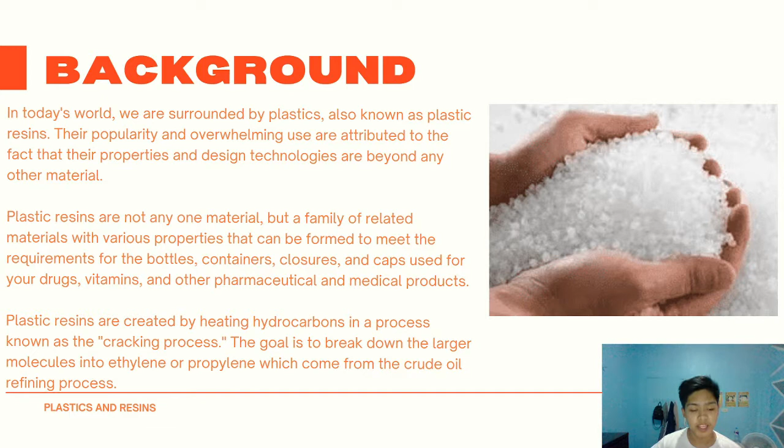Plastic resins are created by heating hydrocarbons in a process known as the cracking process. The goal is to break down the larger molecules into ethylene or propylene, which comes from the crude oil refining process. Let us now discuss the history of the industry.

In 1862, the first man-made plastic was created by Alexander Parkes. The material, also called Parkesine, was an organic material derived from cellulose that once heated could be molded and retained its shape when cooled. In 1907, the birth of the modern plastics era came with the invention of Bakelite by Leo Baekeland. It was the first synthetic plastic which was derived from fossil fuels. Baekeland used phenol, an acid derived from coal tar.

In 1929, Eduard Simon isolated a substance from natural resin. However, he was unsure of the discovery until later when Hermann Staudinger discovered that it was comprised of long chains of styrene molecules, which was a plastic polymer later dubbed as polystyrene.

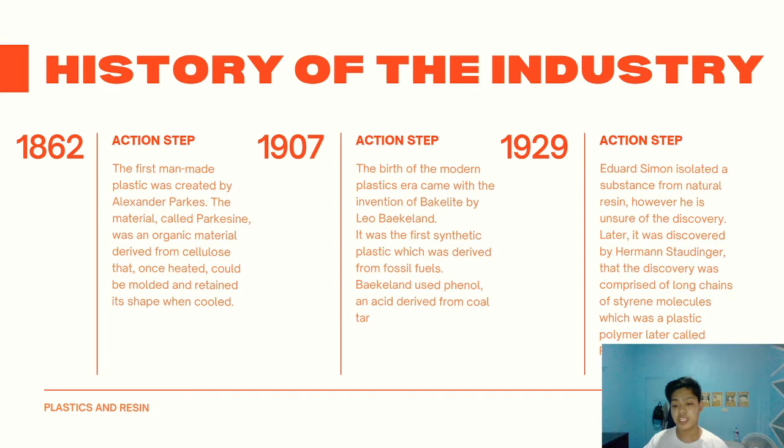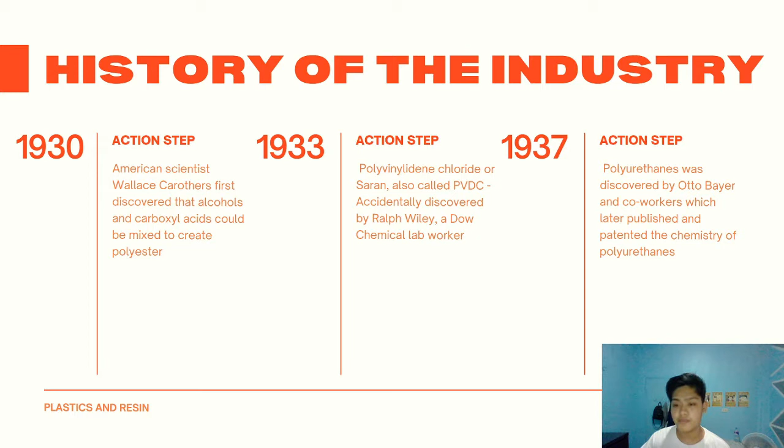In the year 1930, American scientist Wallace Carothers first discovered that alcohols and carboxylic acids could be mixed to create polyester. In 1933, polyvinylidene chloride, or saran, also called PVDC, was accidentally discovered by Ralph Wiley, a Dow Chemical lab worker. In 1937, polyurethanes were discovered by Otto Bayer and co-workers, who later published and patented the chemistry of polyurethanes.

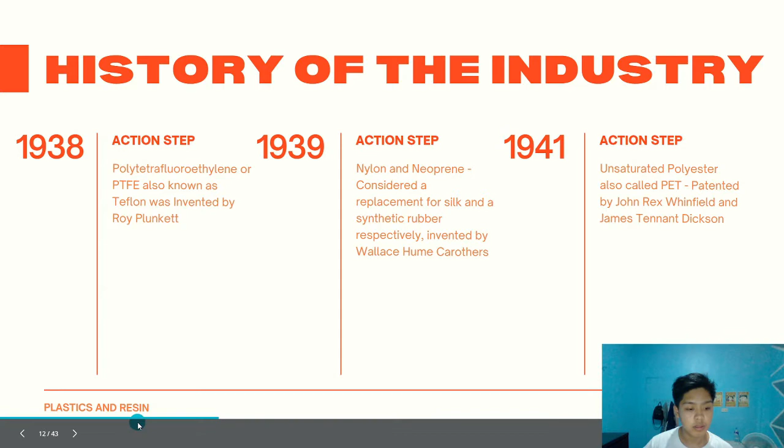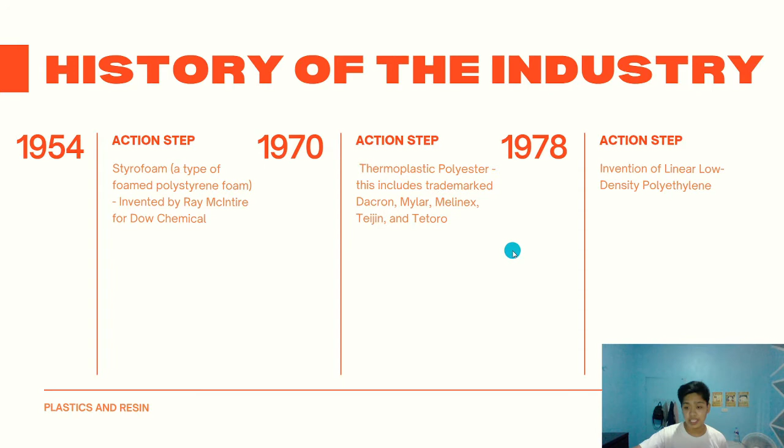So in the year 1954, Styrofoam, a type of foam polystyrene, was invented by Ray McIntire for Dow Chemical. In the year 1970, thermoplastic polyester, which includes the trademarks Dacron, Mylar, Melinex, Teijin, and Tetoron, was invented. In the year 1978, the invention of linear low-density polyethylene was first done.

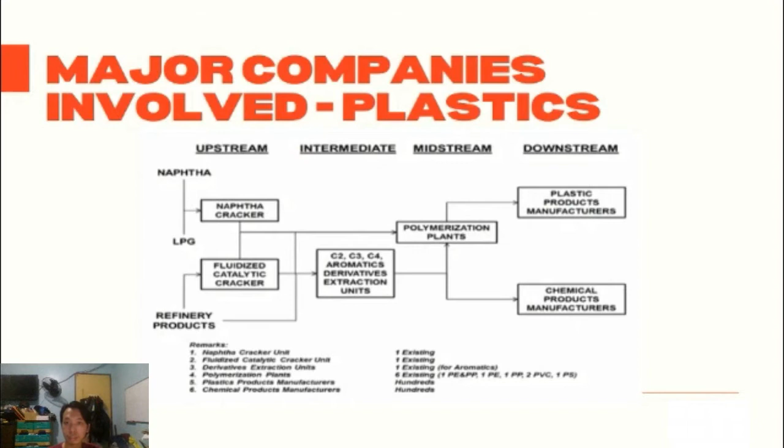As mentioned before, the sectors of the industry have a close connection to each other, as it basically provides the support and raw materials needed for other types of businesses. Next, the leading companies in the petrochemical industry, particularly in plastic and resin materials, are Dow Chemical, ExxonMobil Chemical, Formosa Plastics Corporation, and Sumitomo Chemical.

The Dow Chemical Company, located in the United States, was founded in 1897 by Canadian chemist Herbert Henry Dow and is the world's largest supplier of plastics, including polystyrene, polyurethane, polyethylene, and polypropylene. The firm operates in 175 countries and employs 46,000 individuals throughout the world, and has a significant presence in the Middle East with a group of elite joint ventures with some of the region's biggest names.

On the other hand, in the local market, JG Summit Petrochemical Corporation or JGSPC is the Philippines' largest polyolefins manufacturer, and its Evalene brand PE and PP resins are of the highest quality available anywhere. Polyolefins are thermoplastics made up of polyethylene and polypropylene. They are mostly made from oil and natural gas using the ethylene and propylene polymerization process. That's all for the major companies involved in the petrochemicals industry.

The petrochemical industry plays a significant role in the chemical industry since there is an increase in demand for synthetic materials in today's manufacturing sector and economy. Here are some of the important common products associated with the industry. First off is ethylene. Ethylene is a colorless and flammable gas that is often referred to as the king of petrochemicals. It got its title due to the number of in-demand commercial products that could be produced from its derivatives.

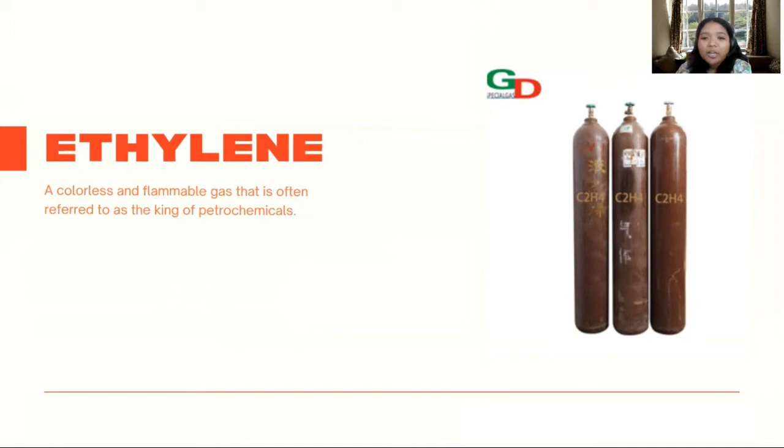It is mainly used in the manufacturing of wire coating, medical devices, and packaging films after undergoing polymerization and producing polyethylene. Next is propylene. Propylene is another colorless and flammable gas that is considered one of the important chemicals in the petrochemical industry, following closely to ethylene. Propylene is mostly used as a feedstock in manufacturing resin and elastomer after undergoing polymerization to produce polypropylene plastic. The produced polypropylene plastic is then used in manufacturing films, synthetic fibers, and plastic bottle caps.

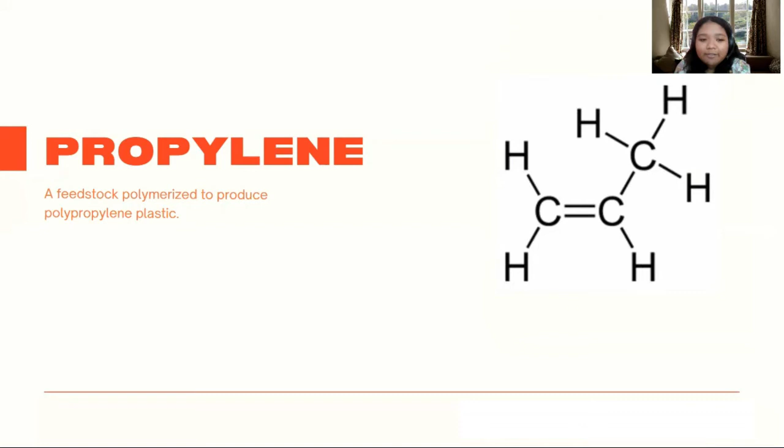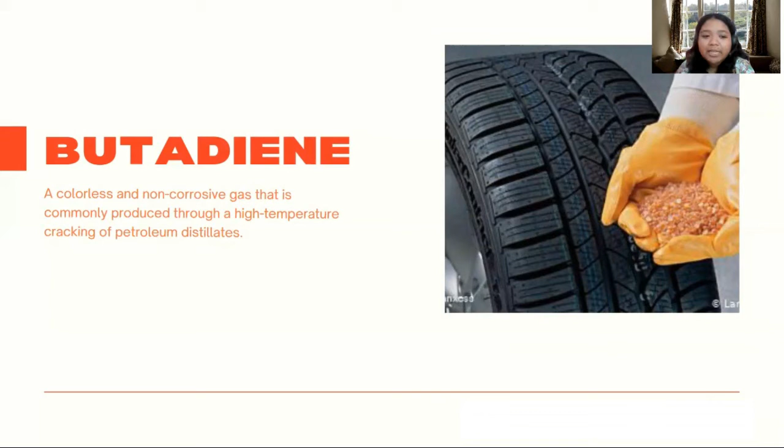Lastly is the butadiene, which is a colorless and non-corrosive gas that is commonly produced through a high temperature cracking of petroleum distillates. It is a versatile raw material that is considered as a major component when it comes to manufacturing synthetic rubbers, polymer resins, and a few chemical intermediates used in the production of nylon fibers and polymers such as chloroprene and adiponitrile.

For the process of making natural rubber, we begin with harvesting latex from rubber trees through scoring or cutting, which is the process of making a single cut into a bark of the tree. Next is coagulation. It is the process that curdles or thickens the polyisoprene into a mass. This process is accomplished by adding an acid such as formic acid to the latex. Water is squeezed out of the coagulum of rubber using a series of rollers. The resulting thin sheets, about 1/8 inch thick, are dried over wooden racks in smoke houses.

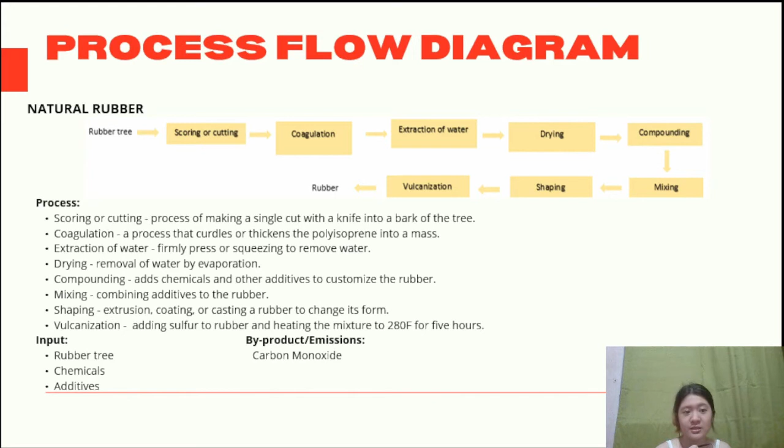Compounding adds chemicals and other additives to customize the rubber for the intended use. The additives must be thoroughly mixed into the rubber. Shaping rubber products occurs using four general techniques, which are extrusion, coating or molding, and casting. Vulcanization completes the rubber production process. It is by adding sulfur to rubber and heating the mixture to 280 degrees Fahrenheit for about 5 hours. The inputs are rubber tree, chemicals, and additives, and for the byproduct or emissions, we have carbon monoxide.

For making synthetic fibers, we begin with monomers undergoing polymerization. It is the reacting of small molecules together in a chemical reaction to form polymer chains. Polymerization processes are performed in the presence of catalysts. Next is pumping. Molten polymer is pumped through a filter bed and then through small deep holes. Both units will lead to high pressure drops along the flow direction of viscous liquids. Then filtration. It is used to clean the spinneret plate.

Then spinning. The fibers are formed by extruding molten polymer through small holes in the spinneret plate. There are three methods of spinning, which are melt spinning, dry spinning, and wet spinning. Stretching or drawing the filament is the process of pulling the long polymer chains to align along the longitudinal axis of fibers, grouping together and developing cohesion. During the drawing process, the polymer chains slide over each other as they are pulled to align along the longitudinal axis of the fibers.

Lastly, finishing and dyeing. During the final process, synthetic fibers are processed with many chemicals to develop and improve their appearance. The dyes can be added to the molten solution before spinning the fibers. Fiber is usually dyed after spinning by pigments dissolved in boiling water baths. The inputs are monomers and catalysts, and the byproduct or emission is carbon monoxide.

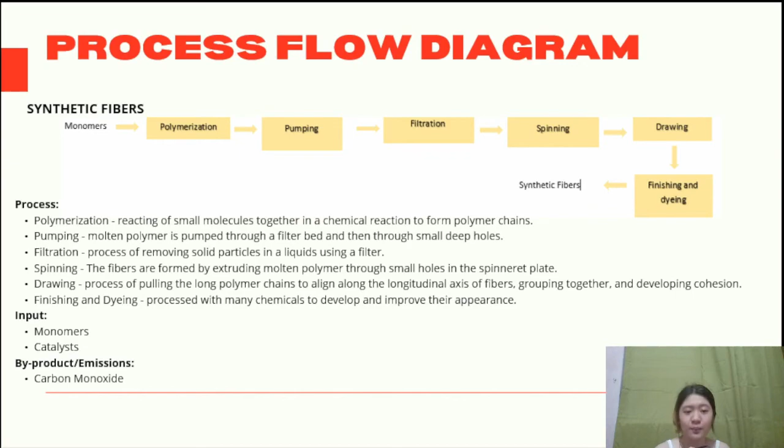Now let's talk about the production of the key products or major products of the petrochemical industry. Remember that these were produced from the basic chemicals which were discussed in the previous video. Let us start with plastics. The first process is called polymerization, in which olefins like ethylene and propylene, or monomers in short, are combined together to form higher molecular weight hydrocarbons called polymers. There are two different mechanisms, namely addition polymerization and condensation polymerization. Examples of addition polymerization include polyethylene and polystyrene, while polyester and nylon are products of condensation polymerization.

Next is compounding, where various materials are melted and blended together with the polymer in order to produce different formulations of the plastics. Then it undergoes pelletizing, where the materials are processed to form into pellets. These pellets are then shipped into different factories to be molded into different materials such as plastic bottles, food packagings, and many more. Our inputs include monomers, as mentioned, such as ethylene and propylene, and our catalyst, which is used in the polymerization process. The byproduct or emissions from the plastic production include chemicals such as trichloroethane, acetone, and many more.

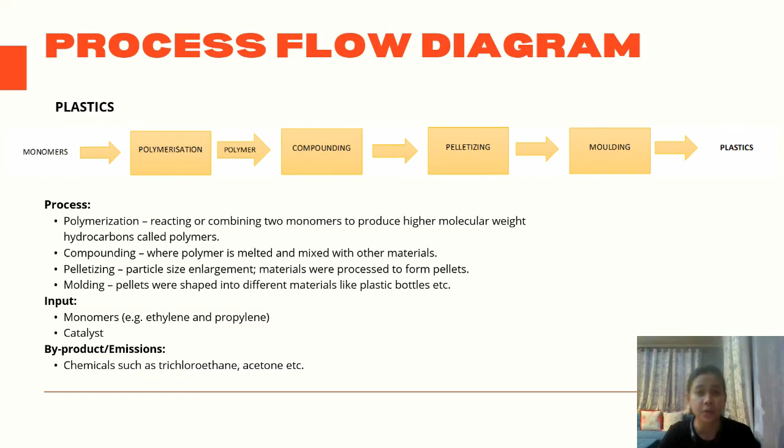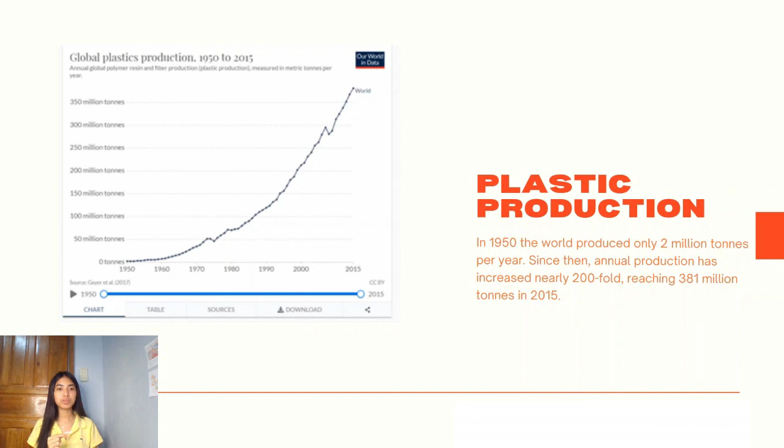The chart shows the increase of global plastic production measured in tons per year from 1950 through 2015. In 1950, the world produced only 2 million tons per year. Since then, the annual production has increased nearly 200-fold, reaching 381 million tons in 2015. For context, this is roughly equivalent to the mass of two-thirds of the world population. The short downturn in annual production in 2009 and in 2010 was predominantly the result of the 2008 global financial crisis. A similar dent is seen across several metrics of resource production and consumption, including energy.

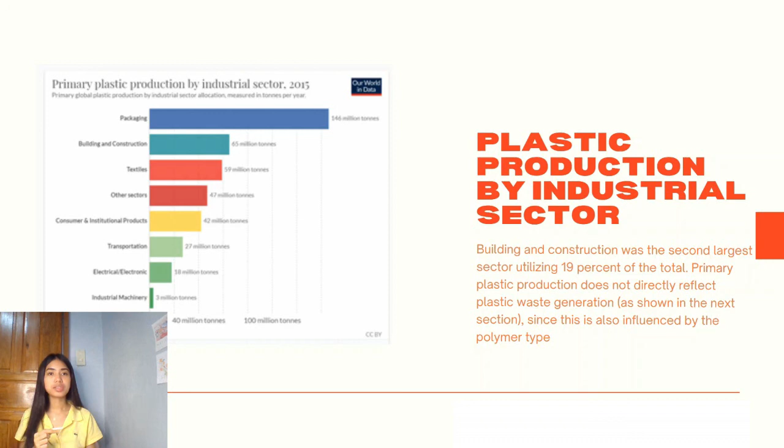In addition, the figure shows the plastic production allocation by sector for 2015. Packaging was the dominant use of primary plastics, with 42% of plastics entering the use phase. Building and construction was the second sector, utilizing 19% of the total. Primary plastic production does not directly reflect plastic waste generation, since this is also influenced by the polymer type and the lifetime of the end product.

For the rubber, the production of synthetic rubber has considerably increased in this century. In the year 2000, around 10.9 million metric tons of synthetic rubber was produced, and this amounted to over 14.4 million metric tons in 2020.